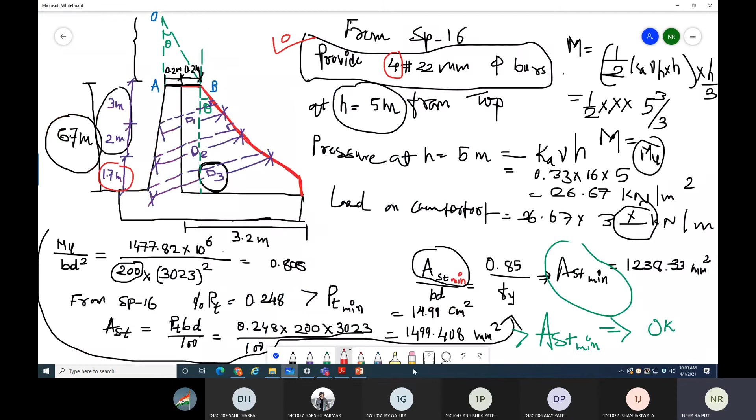But all those members are isolated members. You have done your design of beam, which is isolated beam, means simply supported beam or cantilever beam. Then same way column design, you have done a single column design. In slab you have done the simply supported slab, one way slab and two way slab.

But as a structural engineer you need to provide the structural elements in your plan, and that plan will become your structure drawing, or the center line plan. So the very first thing you need to do once you get your architecture plan is to convert it into a center line drawing or center line plan, right? I'm quickly explaining. I guess you have done this in your laboratory or in building planning also.

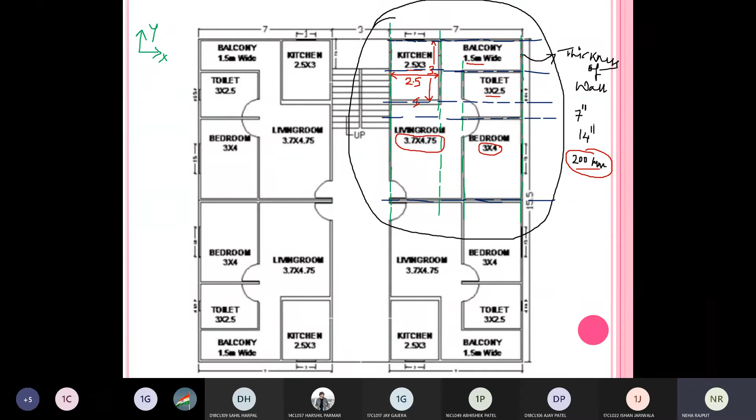Once you get this center line from this thickness of wall, you can find this distance of the center to center line. ये आप यहाँ से ये distance find कर सकते हो. कैसे? This is 2.5 inside, right? If I am considering this 200 mm thickness over here, 200 mm thickness over here, then this is 2.5, half from this side, half from this side. So your center to center of this two line, यहाँ से लेके ये लाइन कितना हो जाएगा, 2.5 plus 0.1 plus 0.1. So this will become your 2.7, right?

Same way, this is 3, inner to inner is 3. If I am considering this as 200 mm, और इसको suppose मैं from eyes, you can see that this is more than this, so I'm considering that 400 mm, looking to the scale. So what will become this center to center distance of this wall from this wall? This will be 3 plus 0.1 plus 0.2. So here this will become 3.3 meter. All these dimensions are meter.

Same way you can find the distance between these two walls. You can find distance between these two. ये तो यहाँ पे आपको मिल गया है, so distance between these two. Same way you can find distance between these two. Right. यहाँ पे ऐसे मिल जाएगा आपको. This also you can find. You can find this wall also. Right. So by this way you can get all the values of your center line. Right?

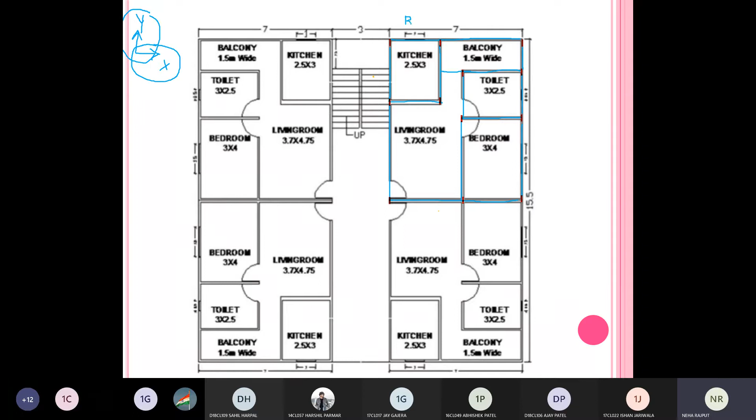The procedure to give the numbering is, you can start with the topmost left side of your member. You finish all your members in the x direction, then you can start with the members in the y direction. So I'm giving the numbering like this: this is my beam, so I'm giving B1. Now the beams are of two types, main beam and secondary beam. Main beam भी होता है, secondary beam भी होता है.

So I can give my main beam the symbolic name MB1, that is main beam, and secondary beam I can number as SB1. अभी मैं B1, B2 ही लिख रही हूँ, but if you want you can give this as MB1, this also MB2. Why main beam? Because this beam is connected with these two columns, this is connected with these two columns, right?

Then coming to this, अभी टॉप से स्टार्ट किया हमने, ये खत्म हो गया, अभी नीचे जाना है. अभी यहाँ पे देखो, this portion of the beam only has the column support, but this portion is not supported by the second column; it is supported by this wall, right?

So this is my MB3. Okay, this is my MB3. Then this one is MB4, MB5, then MB6, MB7. So I have finished all the numbering in X direction.

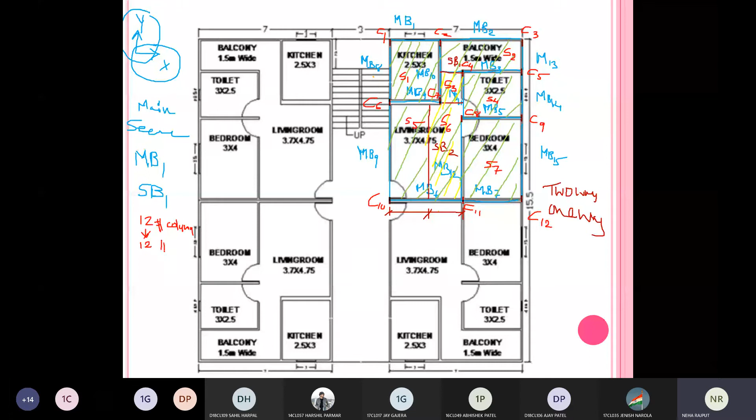If we consider isolated footing, then all these 12 will have 12 isolated footings. You can do combined footing also as per the situation, that we will see later on. So right now, if we consider 12 columns, so 12 footings, then you have 15 main beams, then you have 7 slabs, right? So for one particular floor, there are this many analyses and

designs. There are secondary beams also, so you have 3 secondary beams; if you put one here, that becomes your SB3. So there are 3 secondary beams. So all this analysis and design you need to perform for a single floor.

Then if the plan is same throughout the number of storeys, that will remain same for each and every storey. If it is not, then for that particular floor also you are going to do the analysis and design as per this criteria, right? Okay, any doubt till this?

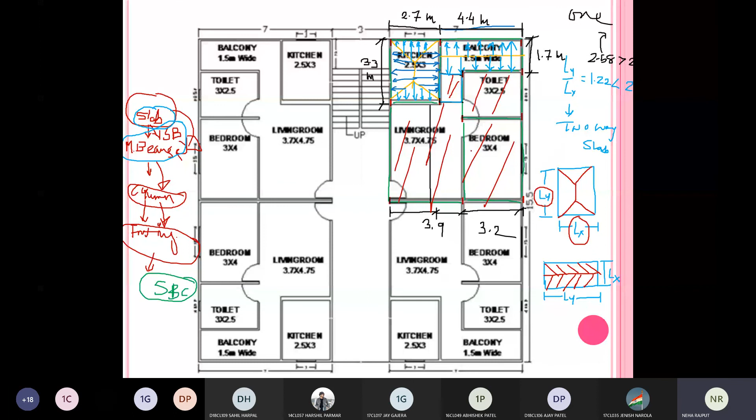Yes, ma'am. Right. So this is all about how you can convert your architecture plan into center line, how you can locate beam, how you can locate column, how you can generate area for the slab, how you can identify one way slab or two way slab, how you can place orientation of column, how you can reduce the beam width, what are the functions of secondary beam, how the load transfers from slab to beam, beam to column, column to footing, and how you can distribute your slab load into supporting beams, right?

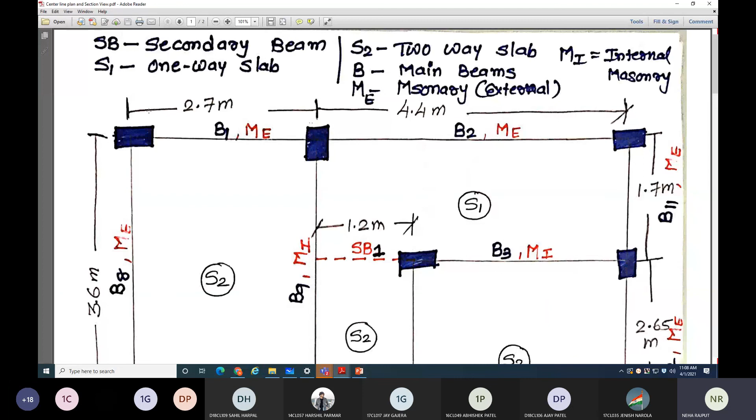So this is all about what you need to do for the exercise before coming to the second lecture. And one more thing I would like to show you: this is my plan, what I have made, right? This is my center line plan. This way you need to do. Right. This ME, which you see here, stands for external masonry. External masonry. This is called internal masonry.

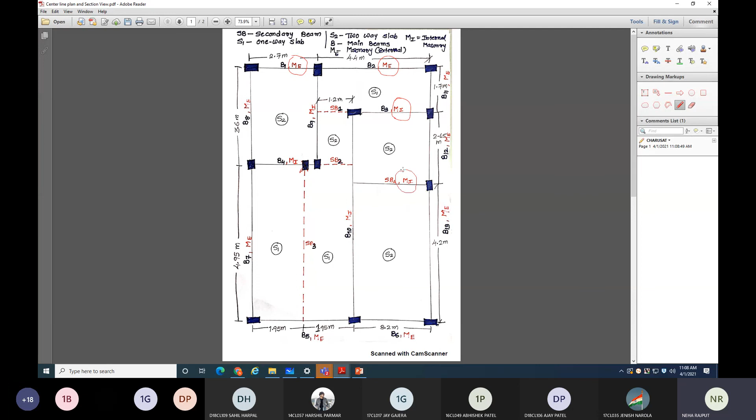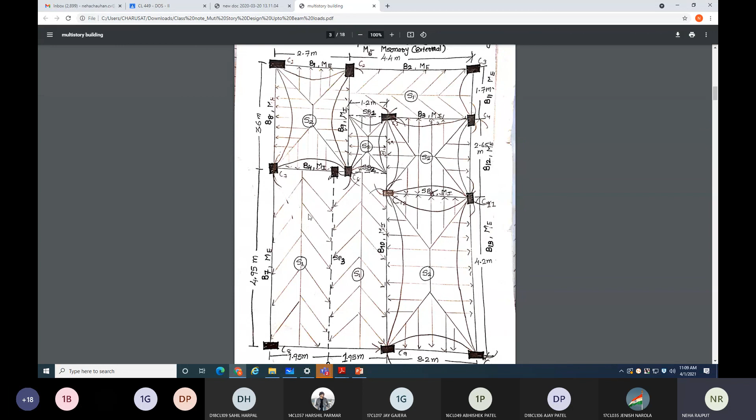Right. These are my slabs. All these are my slab. Clear? This is my secondary beam. And all other dimensions. You have to make this. Very first you need to do this. And what do you have to do second? Second, you need to draw this type of figure, showing this distribution. I showed you this distribution for this slab and this slab. Same way you need to do for all other slabs. Clear? Yes, ma'am. This is to be done second, okay.

So yes, this is all about today's lecture. Do this. We'll start with the slab design, one-way slab, continuous slab and two-way slab design in next lecture. As far as possible, we will go at a higher speed because the lectures are less and we need to finish this multi-story design, which includes one-way continuous slab, two-way continuous slab, continuous beam, column, one combined footing design; isolated footing design you have done in the previous course.

So we'll do one combined footing design, and the staircase design also remains. Right. So we'll try to finish all this by taking extra lectures also. Right.